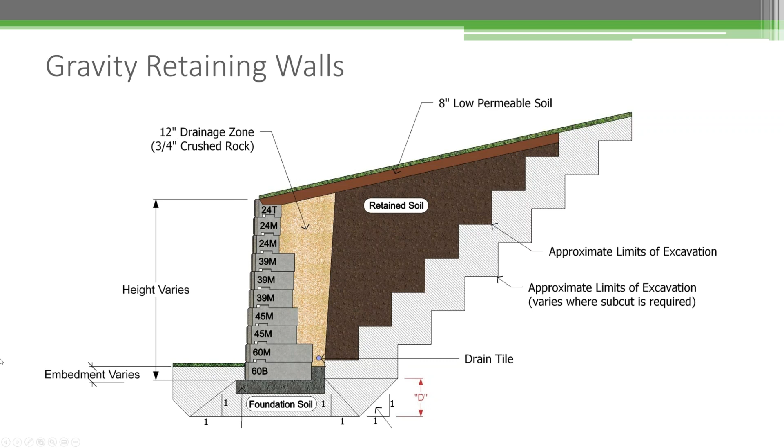Our face sizes are 48 inches long by 16 inches tall, and our depths vary from 24 inches deep from face to tail all the way up to 84, as we'll go through the slide here.

Our blocks are solid concrete. There is no rebar reinforcing. The only metal that we have in our blocks are the galvanized lifting loops that are used to install our products. They're made of wet cast concrete.

It's a durable 4,000 PSI minimum. I think the producers here in Minnesota, Interlock, in conjunction with Rochester Concrete Products, are making a DOT mix that I believe is at about a minimum of 4,000 PSI with 5 to 7% air entrainment. All these numbers mean is that it's a very durable product versus a standard dry cast unit. It's going to last a lot longer through a lot more of those freeze-thaw cycles.

So what is the advantage of a gravity wall? Well, the main advantage is the base to height ratio. Most retaining walls that require geogrid reinforcing have a base to height ratio of about 60 to 80%. Now what that means is a 10-foot tall wall that requires geogrid reinforcing is going to require at least 6 to 8 foot long geogrids, again depending on the soils, the surcharge, and the back slopes and toe slopes.

A gravity wall can get down to as low as 35%, which is on the very low end. Typical is between 40 and 50% of the wall height. So what this allows our product to do, and most gravity wall systems, is to be able to tuck that retaining wall further into the construction cut, closer to the property line, and really maximize that usable space at the toe of the wall.

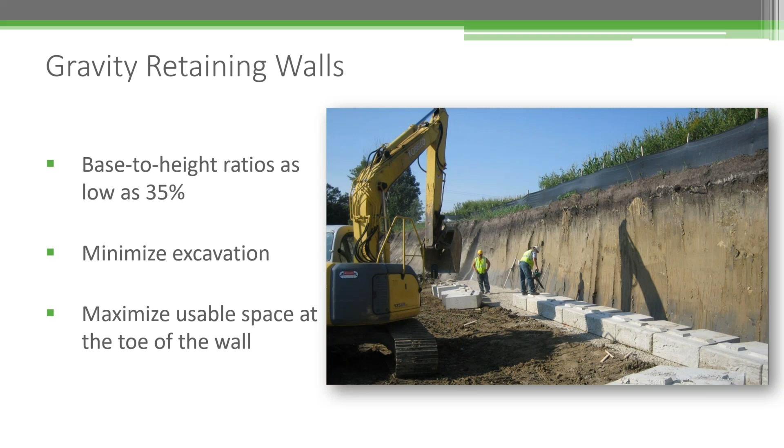This is a construction photo from the Maple Grove Hospital. They have a handful of retaining walls around there right now, and I believe they might be adding some more here in the future. You can see that this is a vertical construction cut. Most sites will not allow a construction cut like this, just from the soils perspective. But this allowed the installer to really push this retaining wall as close to the property line as it could, which is actually the silt fence up top, and again maximize that usable space out front.

Now, if you don't think you've ever installed a gravity retaining wall, you probably have. Most of the small block dry cast units, whether it's 4-inch, 6-inch, 8 inches tall, if you built these things up to about 4 feet or less and didn't use reinforcing measures, whether it's a tieback or geogrid reinforcing, you've essentially built a gravity wall.

You are relying solely on the mass of that retaining wall product to hold back the soil. Now, as you stack up those blocks up to 5 feet, 6 feet, 10 feet, what you're trying to ask that retaining wall product to do is hold back a lot more soil pressure. So in order to do so, that retaining wall product needs to be a lot heavier. Now, a small block system weighs about 80 to 90 pounds. They are just not heavy enough to resist those overturning forces on a wall that's taller than 4 or 5 feet tall. So we need to use deeper blocks, which is where ReCon comes in.

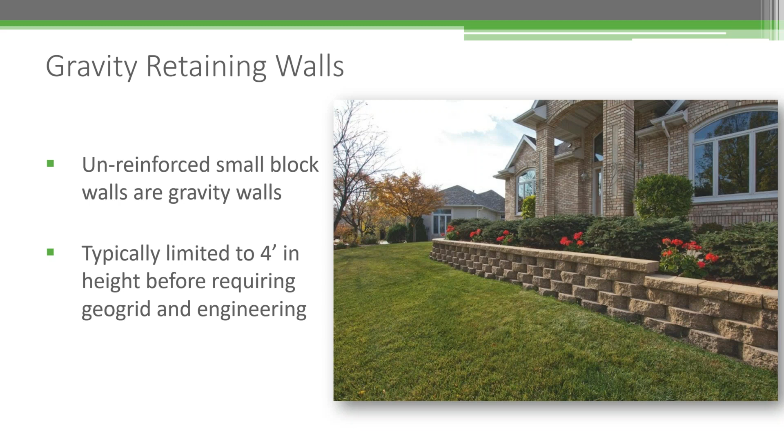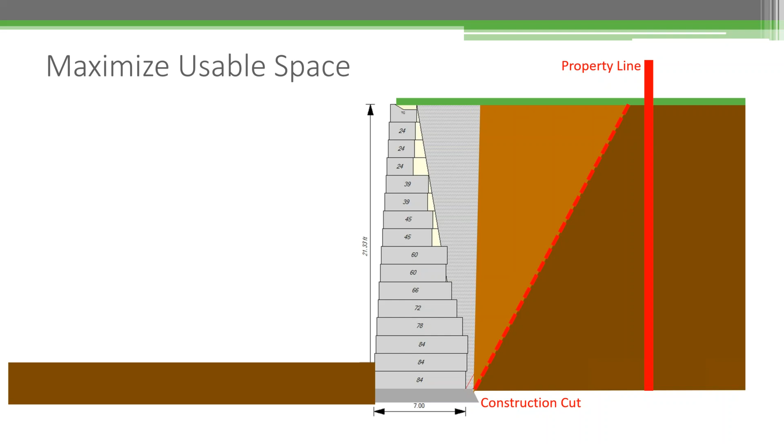Now, with base to height ratios as low as 35%, we can use our big, heavy, massive wet cast blocks as the resisting mass for these retaining walls up to 20, 21 feet tall. Now you can see how much further back we pushed that wall. We essentially went from a 15-foot base to height ratio down to 7 feet, so we gained about 7 to 8 feet out in front of this wall.

For most homeowners, that space is not going to be as dramatic, but for people with really tight property lines, where they basically want to come in and perform surgery on these job sites and maximize the usable real estate out front, the gravity system is definitely the way to go.

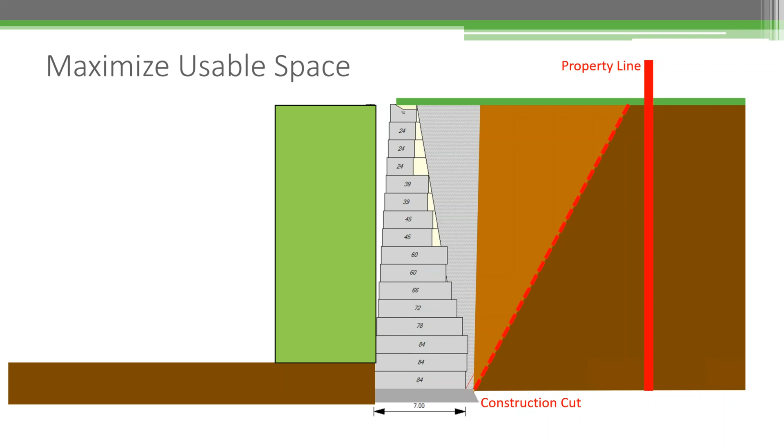So how tall can we go? With sandy soils, with no surcharge loading up top, no toe slope out front, no back slope, and a standard NCMA design, with our traditional 84-inch deep units, which is our deepest unit made out of our standard forms, we can go up to about 21, 22 feet tall, unreinforced. That's a very tall gravity wall.

For the most part, a lot of the projects are kind of in that 6 to maybe 15-foot wall height. That's kind of our sweet spot. We can add a ton of value versus other traditional retaining wall products.

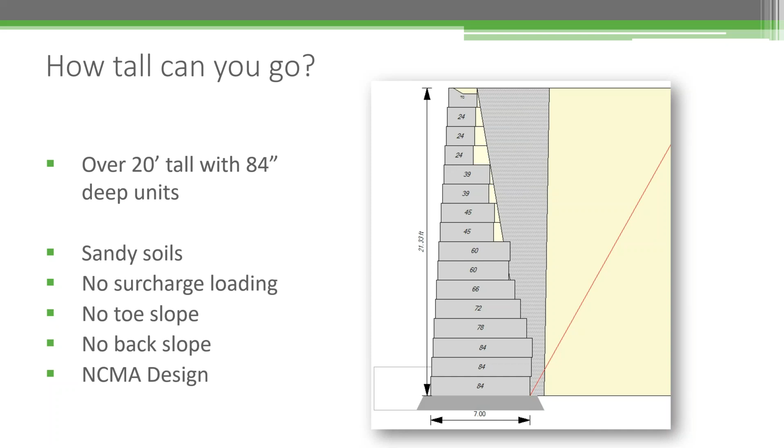How tall have we gone in the past? This is a 32-foot tall, unreinforced gravity wall that was built in New Hampshire less than a year ago. Lots of engineering, lots of very deep blocks, especially the 132-inch deep base block at the base. I would say this is the upper limit currently of our retaining wall system. So anything under 32 feet, we can definitely add a lot of value to your project.

You can see here that they have our 6.5-inch capstone on top of this wall, and they have mounted a pedestrian railing, not just to the capstone, but to the block below it, to add the resisting mass for the overturning forces of the pedestrian railing.

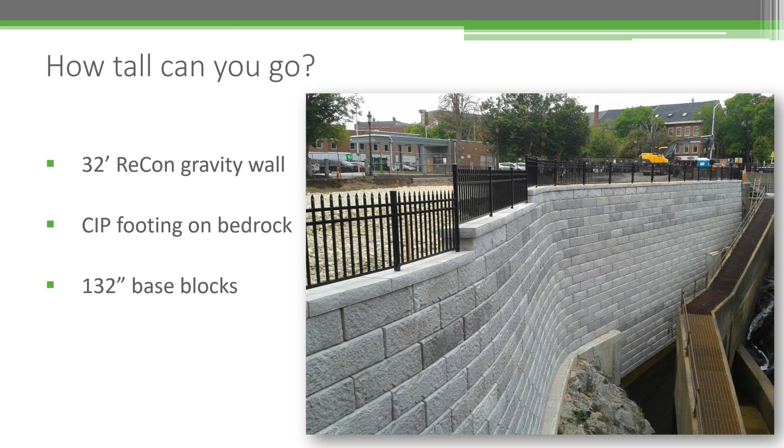Now, traditionally, since a gravity wall system is designed to maximize the usable real estate out front, we want to tuck those walls as close to the construction cut, as close to the property line as we can. So most of these gravity walls are going to be built from the face. You're not going to have access or enough room for equipment behind the face of the wall. And if you're building a wall taller than, say, 12 feet or so, some of your equipment might not be tall enough to reach the top courses.

I don't want to discourage anyone by showing all these giant walls. I know we like to brag about them here at ReCon, but our product looks just as comfortable on a job site as it does in a backyard. Now here's our rustic texture. This is actually from a project in Norway. They have left this product unstained. And we'll talk about staining here in a little bit.

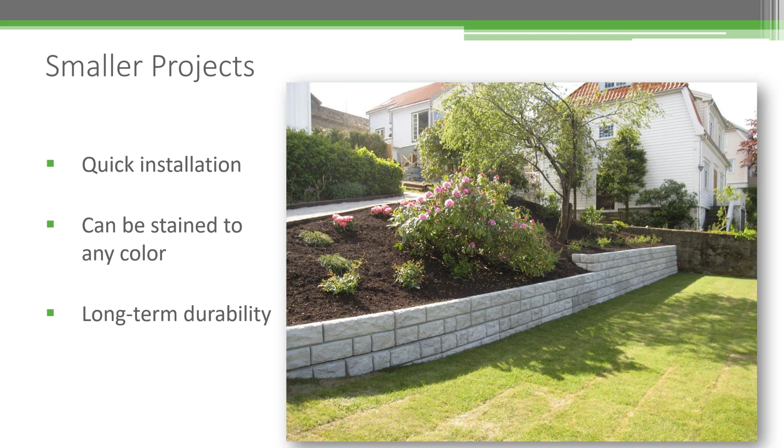Here's another small wall. It's about a 4-course tall wall, 5.33 feet in height. I believe they have used our steps or capstones through the step area to gain access from the driveway up to the yard.

Again, they left this granite texture unstained. You can stain it to whatever color you want using a water-based or a latex-based or even an acid etch stain.

With all the road salts coming in off the road on the driveway, this product is not going to break down, as we have seen with some older, smaller dry cast units in the past.

In walls like this, they can be designed relatively cheap and installed relatively quickly. A 1, 2, or 3 man crew can easily install this wall in a day. They're not lifting up these blocks by hand - they weigh about 1,400 pounds on the low end, up to about 4,100 pounds on the high end.

So moving along, reinforced retaining walls. We've already talked about these a little bit. A large portion of our walls are installed using reinforcing geogrid. The facing component is then our 24-inch deep unit, which is our smallest unit. The base to height ratios for these walls are between 60 and 80% of the wall height.

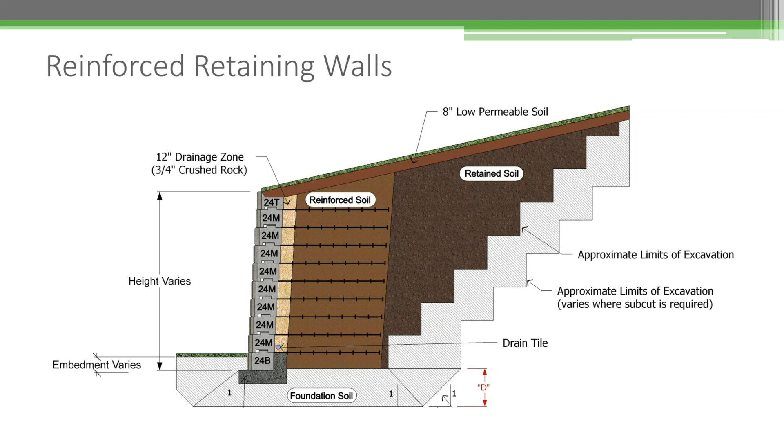How tall can we go with these? Our tallest to date is a 36-foot tall wall in Stillwater, Minnesota, sitting behind an apartment complex out there. This is our limestone texture, stained to match the local colors, the local natural stone of the area. They do have a capstone up on top. This is actually a tiered wall system.

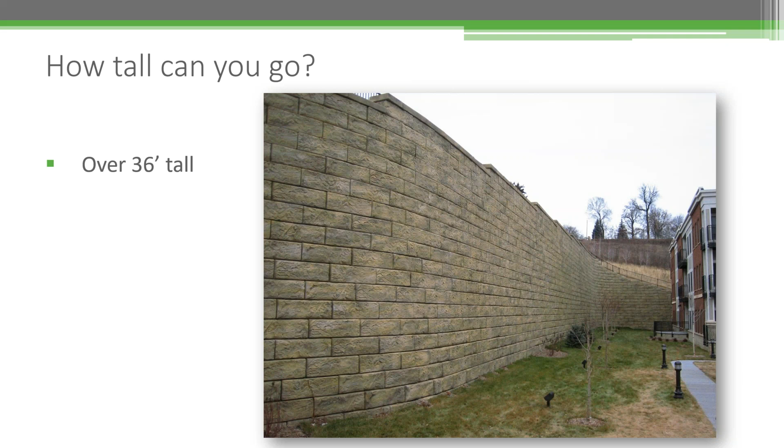This picking device can easily pick up a 24 or 39-inch deep block from the inventory pile and place it on the wall face relatively easily.

You're not going to have an extra guy on the ground unchaining and rechaining blocks all the time from an excavator. You can have one guy in a skid steer, one guy on the wall face. Those two guys can stack a ton of blocks in a day.

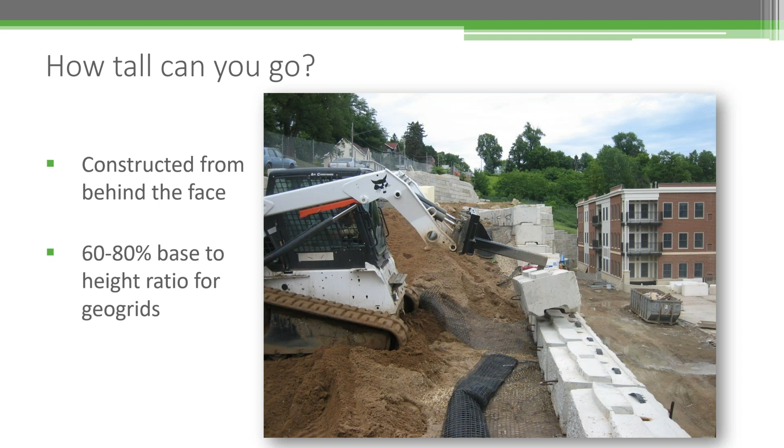Obviously, reinforced walls are nothing new. This is a picture from the Rockwoods website - a very tall, reinforced small block wall. They've got a tiered system out here. A reinforced wall is simply a concrete facing, it doesn't really matter what it is out front, with reinforcing geogrid sandwiched in between the blocks.

They're very stable. They're relatively inexpensive to build from a product perspective. They do take a little bit more time, a little bit more labor to both compact that reinforced fill and place it. We do a lot of these walls as well - I just wanted to show you what was out there.

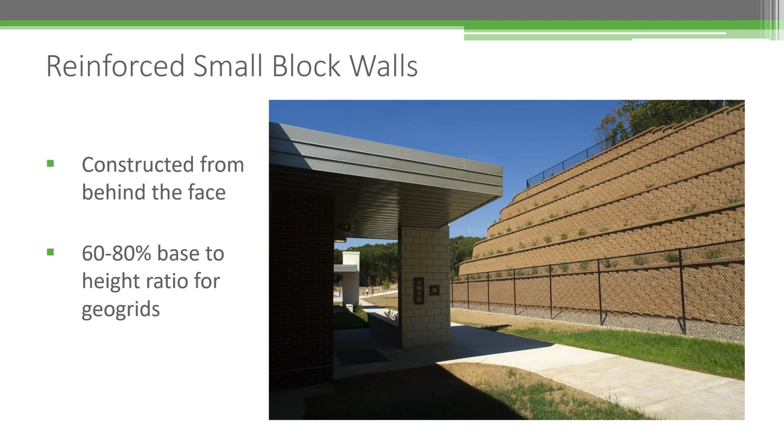So what about our textures, top of wall options, and fence blocks?

Minnesota is a unique ReCon market in that we are headquartered here. RCP and Interlock actually offers all 5, now 6, of our textures to the market here. Le Sueur County Limestone is the one that they carry the most of - this is the product that is most widely in stock for them.

Now, you're going to see a lot of stained walls out here. Our product is going to be delivered to your job site as cast gray. It will be up to you, the installer, the architect, or the owner of a project, to furnish the staining yourselves. A lot of the installers like to stain our walls. We do have a staining guide available that has product recommendations for everyone.

Staining is one thing that's kind of unique - it's in the eye of the beholder, where from one customer to the next, they might not like the exact same stain. So I think if you're going to start staining your own walls, it would be in your best interest to get a sample, stain up a block that's going to be below grade maybe, and see if your customer would prefer that color over another one.

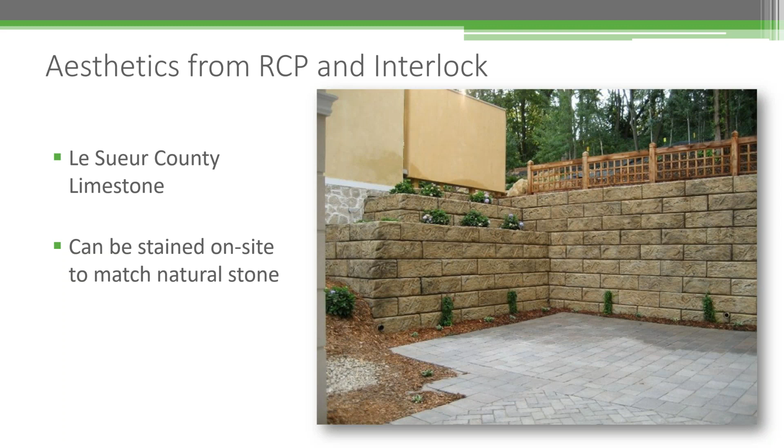North Shore Granite, I would say across our system worldwide, this is our most popular texture. Most of the time this is installed as cast gray and is not stained traditionally.

Our rustic is our 8-inch stack stone coursing. These are still full face blocks, 48 by 16. And the depths again range from 24 from base to tail all the way up to 84. But this one just looks like it's an 8-inch stacked stone look.

I would say this texture, more than any other one that we have, eliminates picture framing, where you really can't tell where one block starts and the other one begins. It kind of just looks like one big monolithic stacked stone wall.

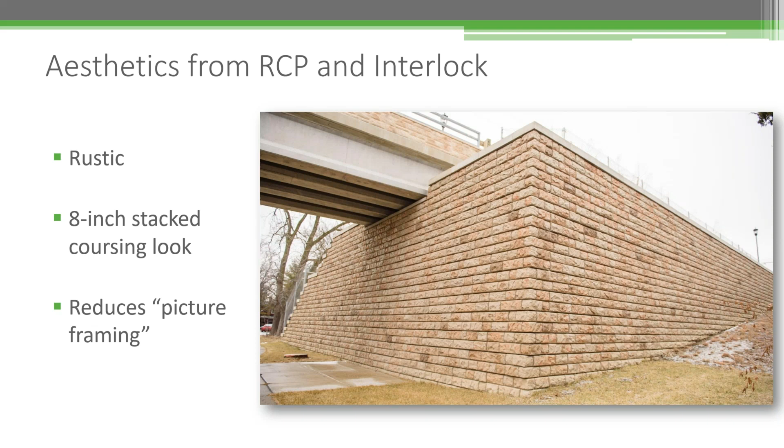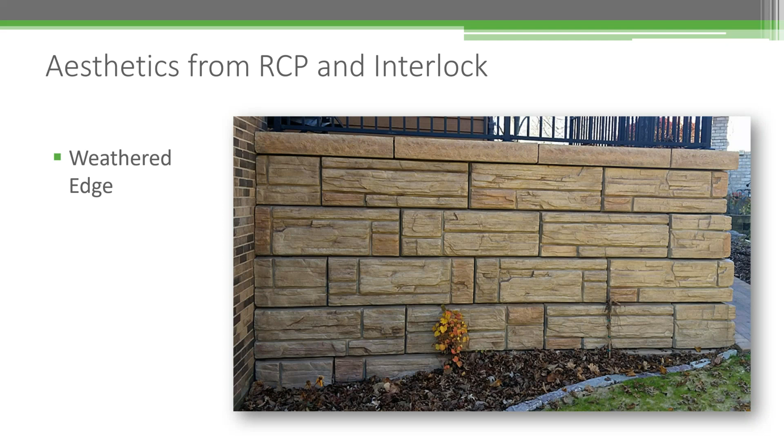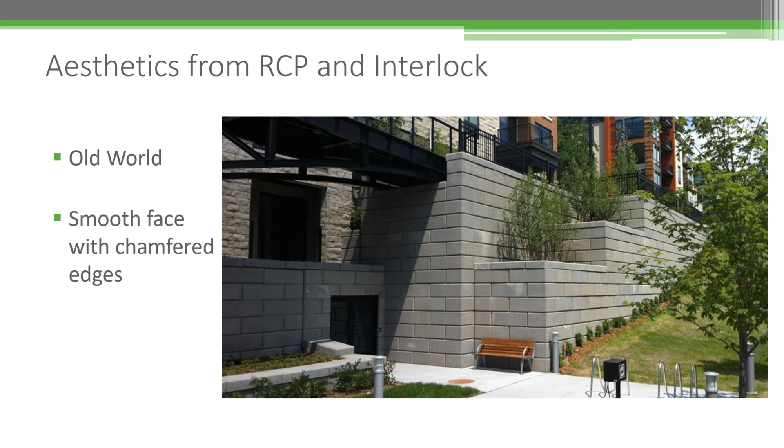This one's actually stained, maybe a 1 or 2 part stain. Again, it can be stained whatever color you'd like. I would say, contact your local RCP rep for pricing and availability for all of these textures, for all of these block depths.

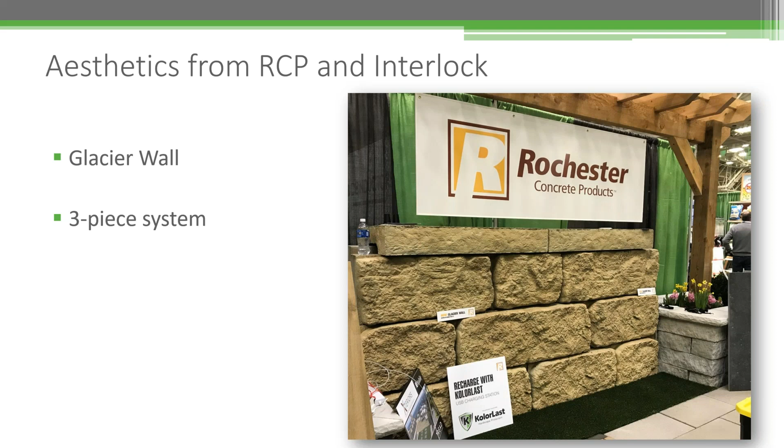Obviously this is a very large wall. They've got some JLG equipment to reach the top of the wall. But for the most part, 1 to 2 part stains is going to be what you're going to see on a lot of our walls.

Like I said, we do have a ReCon staining guide that is available. We do have some products that we have seen used in the past, from Sherwin-Williams to TK. At the end of the day, any concrete stain, if you can stain it on a horizontal surface, you can probably stain it on a vertical surface, maybe just a different application method, whether it's an airless sprayer or a rag or something.

I think the most important part about staining is if you're going to do it yourself, you need to make sure your first step is to, at a minimum, power wash the wall. These products are made in steel forms that have form release agents on them. They still will remain on the face of the blocks for some time, depending on how quickly they were made or from how long ago they were made. So whether it's just a simple power wash or maybe even a muriatic acid solution to really score up the face and get all those oils off, it'll really accept your stain a lot better.

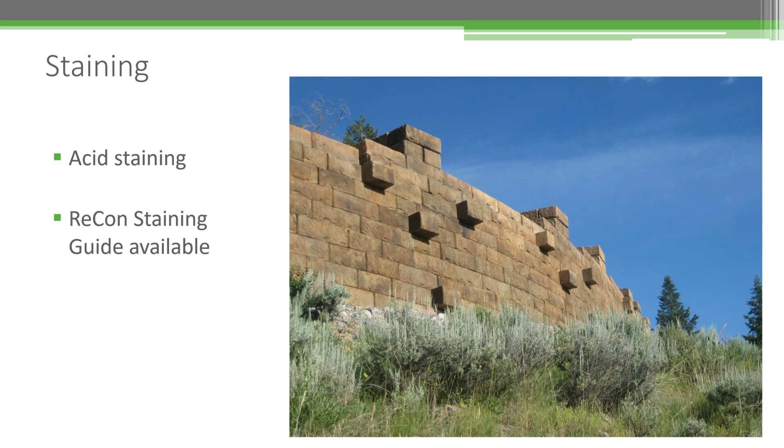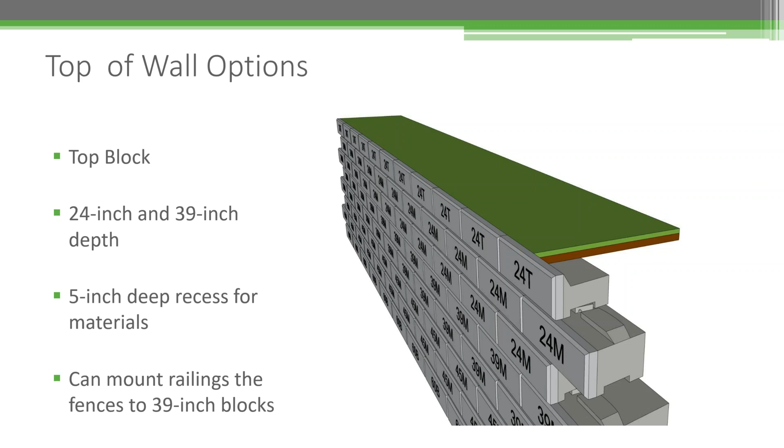Now, if you're planning on mounting a railing to our top blocks, our 24-inch deep units are just not quite heavy enough to withstand the overturning forces as required by the IBC code. We do, however, have a 39-inch deep top block from face to tail that is heavy enough. So when you mount it, whether you plate mount it or have holes cast through the block to slide your fence post in there, a 39-inch deep top block will be heavy enough to withstand the overturning forces as recommended by the IBC code.

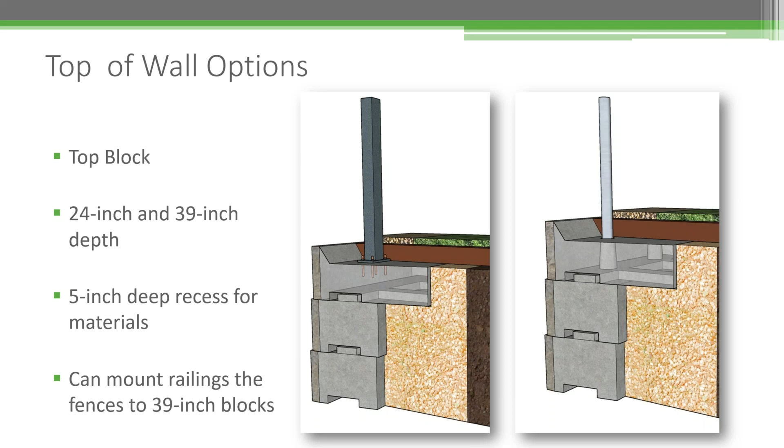Here's that 39-inch deep top block in action. This is at an airport in Texas. Obviously this is a commercial job site. They wanted this hand railing, this pedestrian railing, to be nice and strong and sturdy, and all they needed to do was plate mount it to our 39-inch deep top blocks.

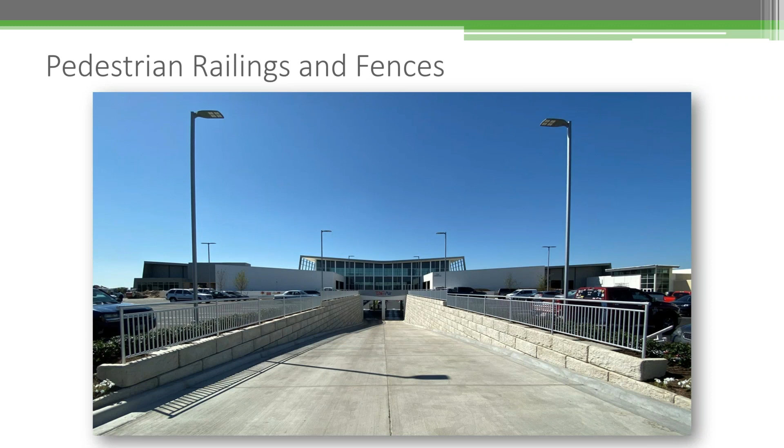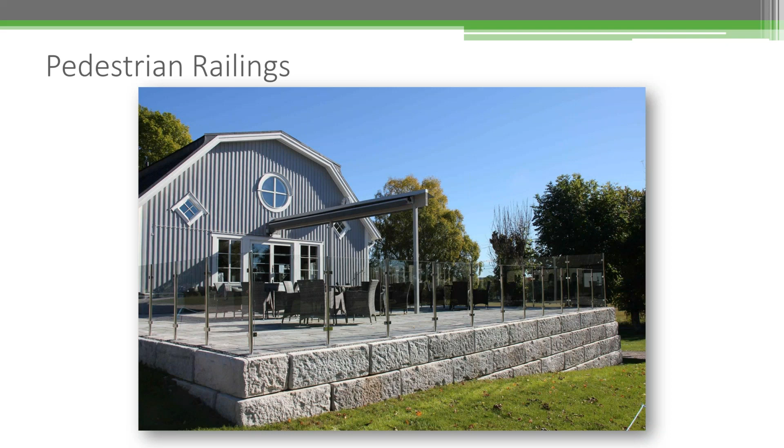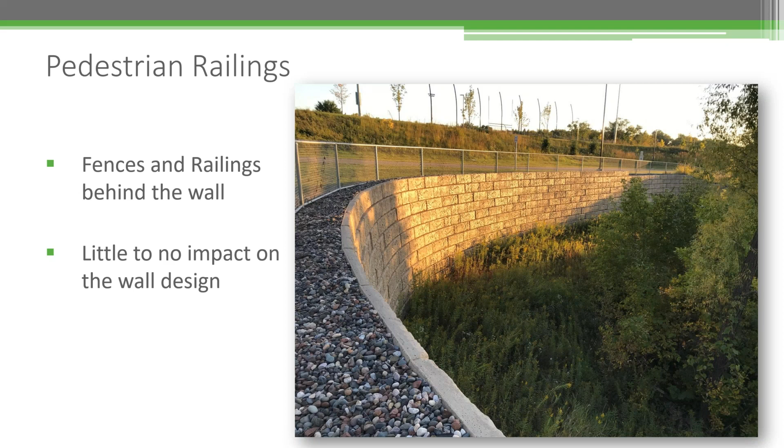Capstones. Here in Minnesota, you guys again have a unique opportunity - you have 2 different capstone heights, a 6.5 inch tall and an 8 inch tall capstone. The standard one is 6.5 inches tall. We've done a lot of amphitheaters in this state, a lot of small walls. It's kind of a traditional accent capstone like you'd see on a dry cast small block unit. It's 26 inches wide, so it's 2 inches wider than our 24 inch deep unit. You can push this thing all the way forward to have a 2 inch overhang on the front, or push it flush with the face. It's really up to the customer.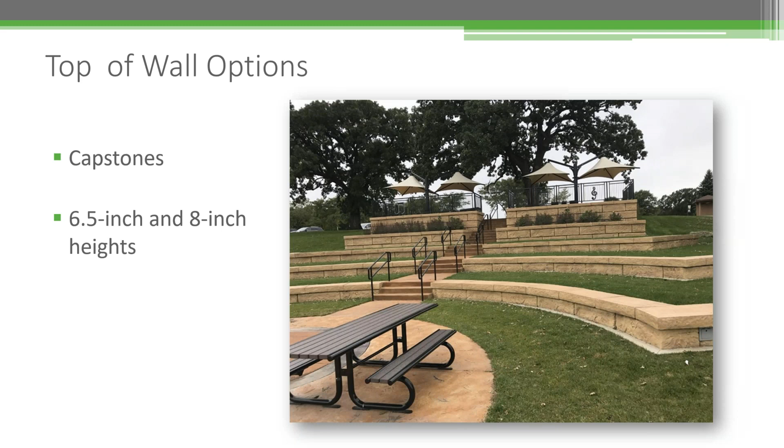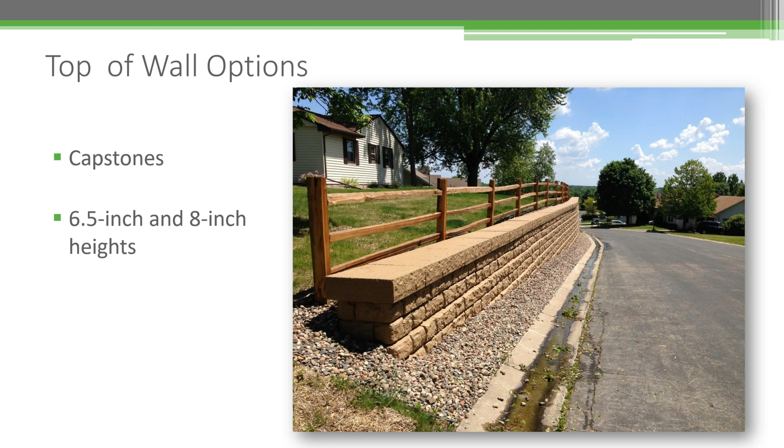Here's Trinity School, again here in Minnesota - they have an 8 inch capstone. The architect wanted to match the 8 inch coursing of our rustic, so the 8 inch capstone was used here. This was just stained with one base coat, 2 base coats, of just one color of stain.

Our 6.5 capstone is actually underneath the ADA requirements for step heights. So 6.5 inches is under what they require, so we can use our capstones as steps through our walls, something we've seen quite a lot of. There's a ton of pictures on our website if you'd like to check that out.

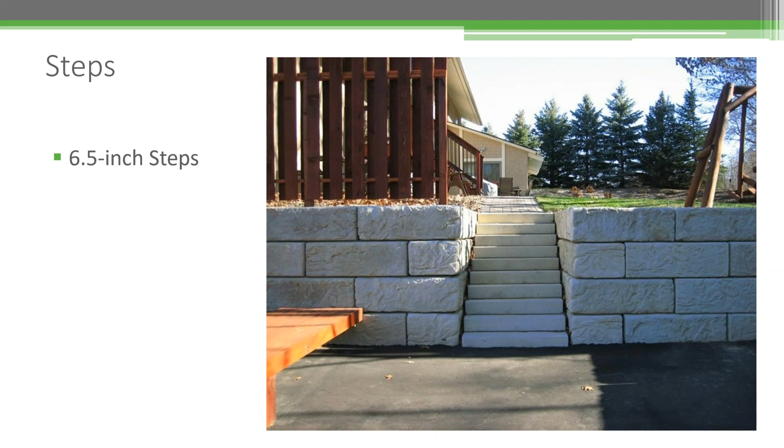The final option is the full high cap. This is a full height, 16 inch tall capstone, which has textures both on the face of the wall and on the back side and on the top. So when you have sloping grades like you see here, whether it's a driveway, sidewalk, or even just a sloping yard, instead of having to step down 16 inches at a time, you can keep this grade nice and steady all the way down and still pick up texture on the back side of your wall.

You can see here that they have actually mounted a fence to this. I believe they just kind of cored into these blocks and slid these posts right down into there.

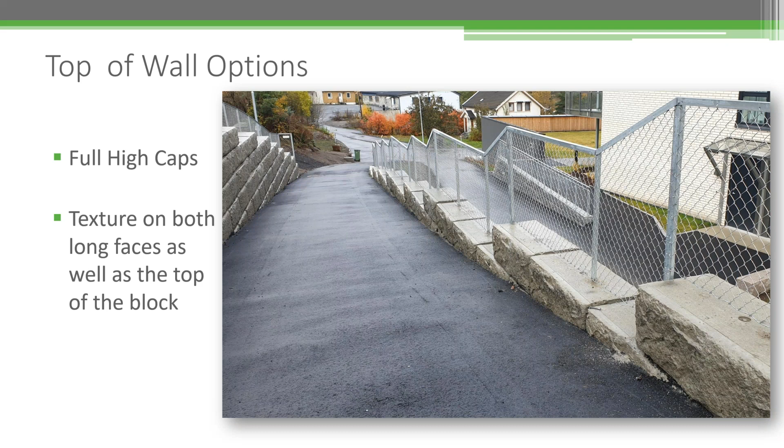In line with our fence, with our full high cap, we do have double-sided fence units that do not have texture on top. This picture kind of has it all, really.

In the background, we have a near vertical gravity wall. Our walls have a built-in batter of 3.6 degrees, or 1 inch per course traditionally. In order to meet the abutment and the vertical brick face, the contractor in the field cut the back off of the tongue to slide that block an extra inch forward, and it allowed them to build a vertical wall. This wall was designed with vertical batter, so it was not a last-minute thing.

In the foreground here, you can see a full high cap. This is actually on top of many different fence blocks, so on the back side, the railing side of this wall, there's also texture on there as well.

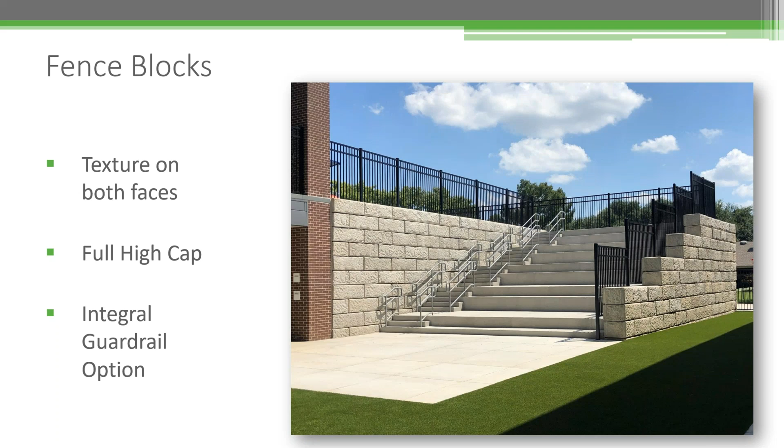One thing that's kind of cool about our double-sided fence blocks is that we can cast holes into them, and attach them with rebar and grout to either a 60-inch deep unit or a 72-inch deep unit. This 3 or 4 block system can be used as an integral vehicle barrier. It can meet the IBC code of 6,000 pound impact or an AASHTO TL1 of 13,500 pounds.

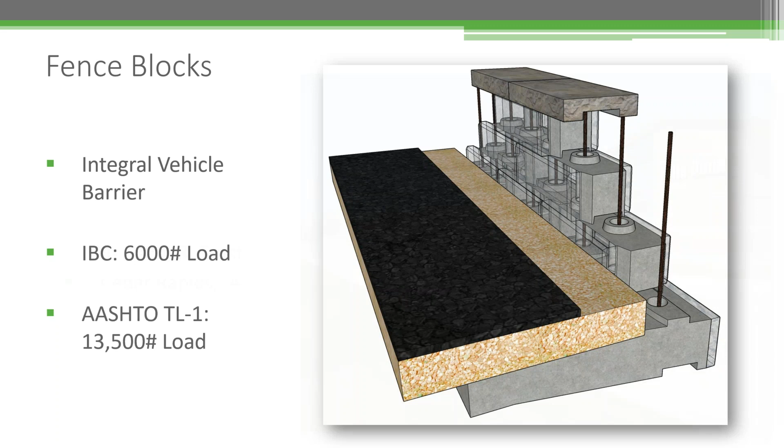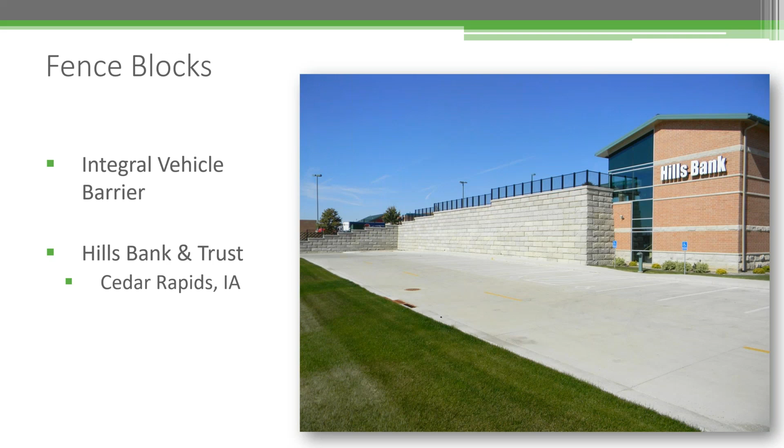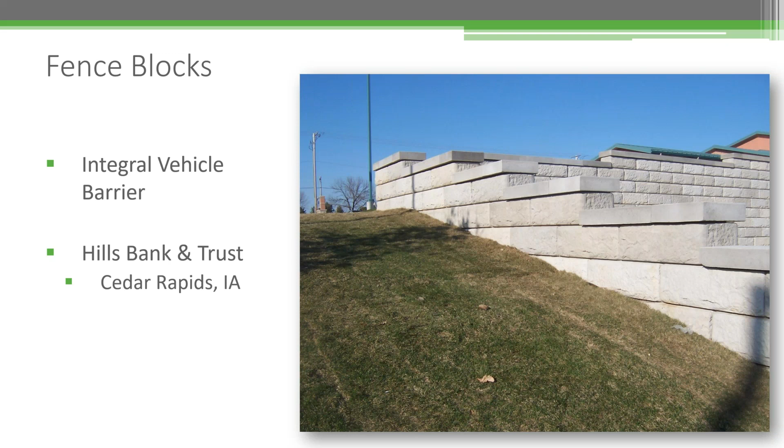So here's a project down in Iowa. It kind of has it all, really. We have a standard retaining wall out front. They've got fence blocks with capstones as you walk around up to the top of the parking lot. Then, as you're in the parking lot, you're looking at the back side of a fence block with a capstone on top. But what you don't know is that 2 or 3 courses of these are attached together with a moment slab block below grade.

And if you were to run your car into this, it will act as a vehicle barrier, and you will not go over the face of the wall down to the lower parking lot.

What this integral guardrail does is maximize the usable space behind the wall, as opposed to the space out in front that we have for a gravity wall. A guardrail system out front, whether it's a post and beam or another type, is going to take up space between the wall back and the curb, and they just didn't have that room here, so they wanted to make the wall system the guardrail system, and we definitely have those options as well.

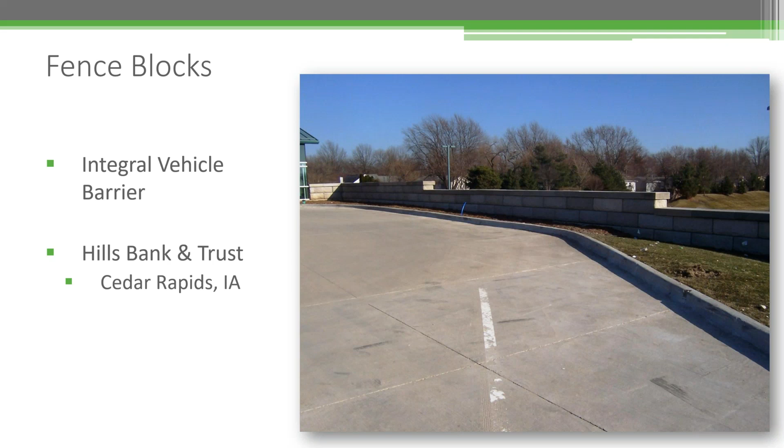These are very complicated projects, lots of pre-construction planning, lots of pre-bid planning, a lot of in-the-field cutting of blocks. And if you've ever had to cut a 90-pound dry cast unit, it doesn't take too long. If you're thinking about cutting one of our units, it can take a significant amount of time unless you have fitting blocks.

I think most of our big block competitors do not have contractor-friendly fitting blocks that allow you to easily modify the blocks. If you've ever had to cut from face to tail, either a 24-inch deep unit or a 39-inch deep unit, you know that it'll take a ton of time. So if you know that you're going to have cuts in the field, or you anticipate having to do cuts in the field, ask your RCP rep for some fitting blocks. We do have 24 and 39-inch deep fitting blocks, and our full high caps come with a fitting insert as well, so you can cut those blocks around radiuses on the tops of your walls.

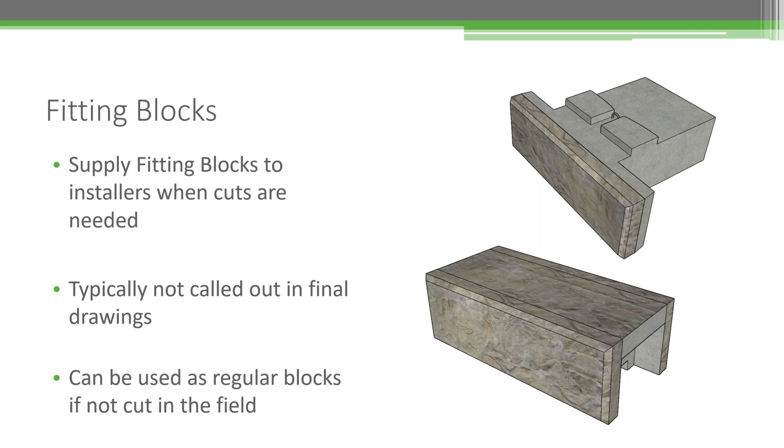Wait for my computer to catch up here. Sorry, guys. I'm looking at the audience view, and there's quite a bit of a lag here going on.

Okay, all right, installation equipment and tools. I did want to quickly talk about installing our product. It's really no different than any other retaining wall product, obviously much larger. But I did want to talk quickly about preparing for your project. Final stamp plans on walls that are greater than 4 or 5 feet are required here in the state of Minnesota. Obviously, taller walls that are unreinforced with gravity units are holding back a lot of soil, so we really want to make sure these walls are engineered. RCP has a lot of really good relationships with really good retaining wall design engineers here in Minnesota, so they'll be able to provide you nice, good quality stamp shop drawings that you as an installer can build off of. You can have confidence that the retaining wall you are installing is designed for the situation it's being asked to be in.

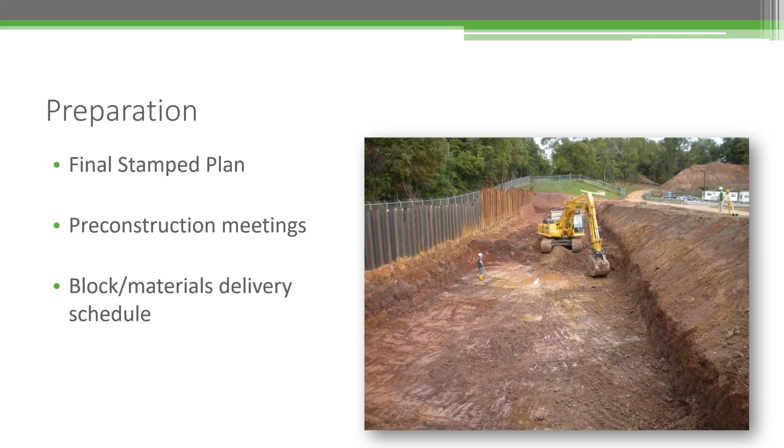Pre-construction meetings are also really important. Constant communication with your RCP rep is going to be really important, especially as you start to receive materials on your job site. We can only get about 32 to 34 blocks on the truck at any given time. They weigh a lot, so we can't get a lot of square feet on each truck. It's not like getting 500 or 600 square feet of small block delivered. You're only going to get about 160 square feet delivered per truck, and they take up a lot of room. So kind of game planning with your sales rep on what blocks you want to install that day or for the next couple of days, and coordinating with the interlock dispatcher so you can get the blocks you want on site when you want them is going to be pretty important.

What about crew size and equipment? Labor was a little hard to find earlier, before the events of the last few weeks. At that time, we were seeing a lot of crews downsize from 5, 6 guys down to 2 to 3. ReCon, since it's a machine-set product, can take a lot less guys to install it. Let's just put it that way. One laborer, one machine operator can pretty much install a ReCon wall all day long.

From an equipment perspective, at least an excavator, whether it's a mini X or a larger one, to pick up our bigger blocks. This is going to help you not only dig your base trench, but also set your first course as well. A skid steer to bring blocks from the inventory pile down to the wall site, same with any backfill material or aggregates, is going to be important. And then any compaction equipment. Compaction behind our walls, like any retaining wall, is going to be tremendously important. It's especially important on the geogrid wall, where you're really relying on that geogrid soil connection to add stability to your wall system.

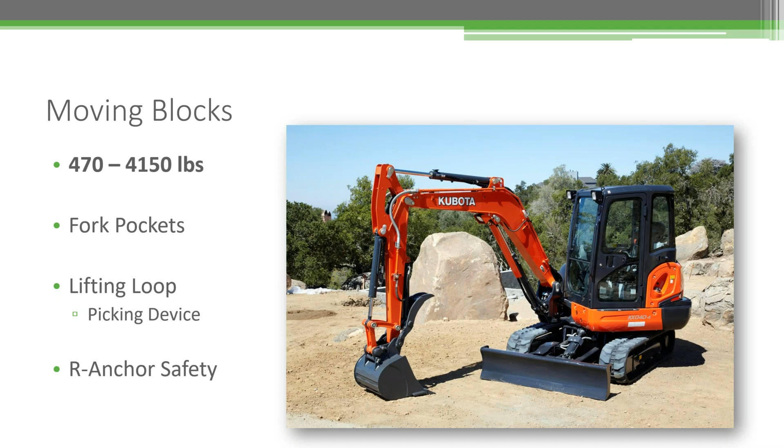For the most part, a mini excavator like this can easily pick up a 1,400 pound, 24-inch deep block. They might be able to pick up a 2,000 pound, 39-inch deep block with the arm up against the cab. But as soon as you go to extend that arm out to lay your base block in there, your hydraulics might be a little bit overtaxed, and now you're coming into a safety issue. So having a piece of equipment on site that is strong enough to pick up your largest block with ease is going to be a really important step during your bidding. Maybe you have to rent it or borrow it from another landscaper or something. Whatever you need to do, do not have undersized equipment on your job sites.

RCP makes blocks with fork pockets in the back. These will fit a standard 4-inch wide skid steer fork. You can easily pick these things up from behind, move them from off the truck to your inventory pile, from your inventory pile down to the wall site. It just makes it a lot easier to move blocks around the job site.

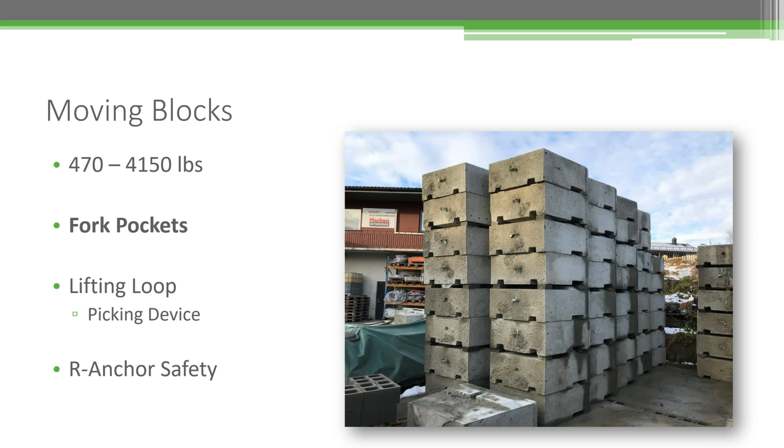We've talked a little bit about the picking device. It's a universal attachment for either a Bobcat, a Case, or Caterpillar. It has a very hard T1 steel hook on the front. We have tested this hook to about 65,000 pounds of force. It's a very high carbon product, so it's not going to wear. Our older ones tended to wear out a little bit, but this new one does not. I can definitely get you in contact with the guy who makes these. He's out of Rice, Minnesota, if you want.

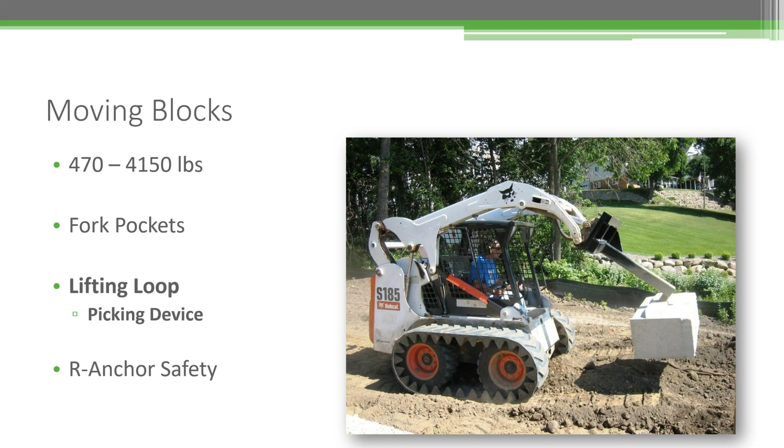A picture of this thing. Oh, we got some lag here again. Sorry about that. Yeah, so here's just another picture of that picking device.

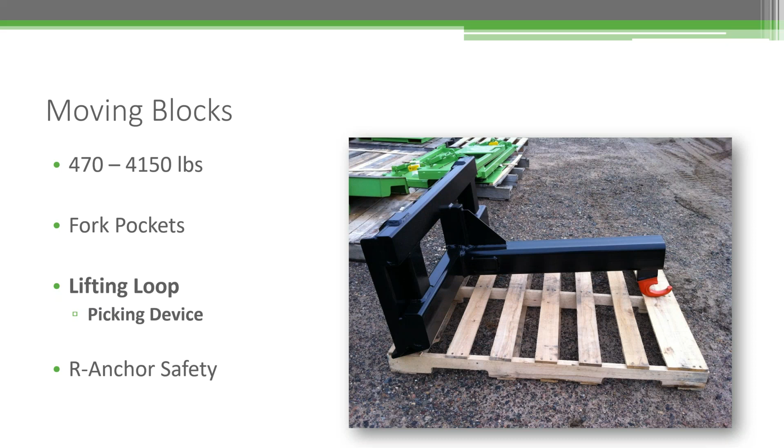I did want to quickly talk about our lifting loops. They are galvanized, solid rebar anchors. There is a right and a wrong way to pick these things up. Whether it's a pick hook, a clevis, or a strap, these are all good things to use. Never oversized hooks or even binding hooks, like for binding chains. Those should not be used.

If you're going to be transporting blocks across your job site suspended, we recommend that you use a cable, or even a chain with a cable extension on it, something to add a little bit of extra bounce to this. If you have a 39-inch deep block hanging from a chain, and you're walking it all the way across your job site with an excavator, you're adding a lot of dynamic loads to that rebar anchor. They're not really designed to do that. So you're putting yourselves and your crew at a little bit more risk if you're doing that without a stretching cable.

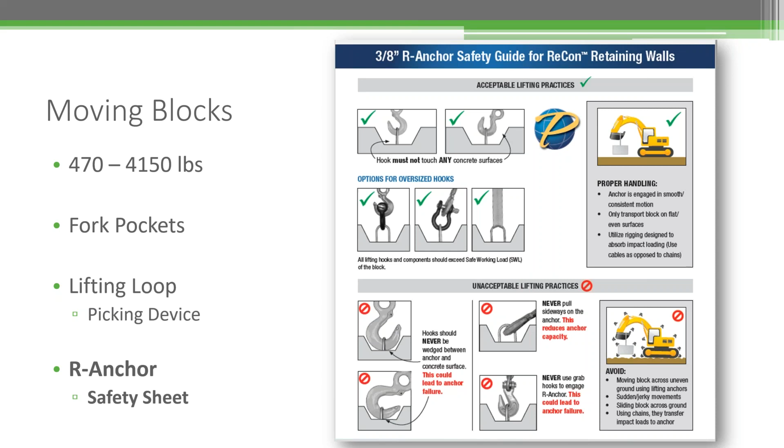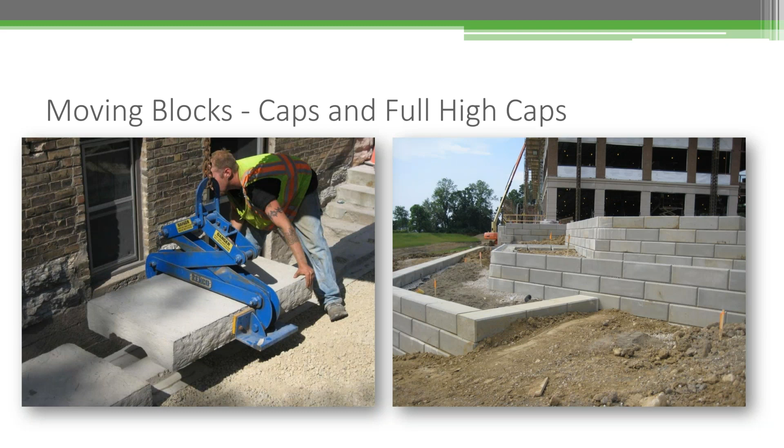Capstones and full high caps, since they do not have lifting loops on top, we do have a Kenco lifting clamp that we can sell. I think PaveTech makes one too that we've seen used for capstones. Our full high caps are about 1,500 pounds. I'm not too sure of any other lifting system other than Kenco, maybe there's some out there that can easily grab onto and lift that weight of block. Most of our big-time installers have their own. I think you can either rent or purchase these from RCP or from ReCon as well.

Hand tools and electronics, basically the same tools that you're going to use to install small blocks, you're going to use with our big block system. Laser transits, levels, string lines, marking paint, backpack blowers to clean off all the rocks off the top of the wall, and a 14-inch diamond bladed chop saw.

Honestly, the whole process is very similar to installing small blocks. You dig your base trench, set your leveling pad material, level your base blocks. The only real difference is that if you take a 5-pound dead blow hammer and try to smash one of these 1,400 pound blocks to get it to level in, it's not really going to go anywhere. So now your excavator bucket becomes your hammer. And if you've got a guy in the controls in the cab with some pretty heavy hands, they can take all of your base course leveling work and prep work and throw it out the window.

So constant communication from the guy down in the trench to the guy up in the machine is key. Push down on this corner, push down on this corner. Gently tap the back, gently tap the front. You're going to be spending a lot more time preparing your leveling pad than you'd have traditionally with smaller blocks, just because you really don't have a lot of room for error when it comes to setting that block down on the ground.

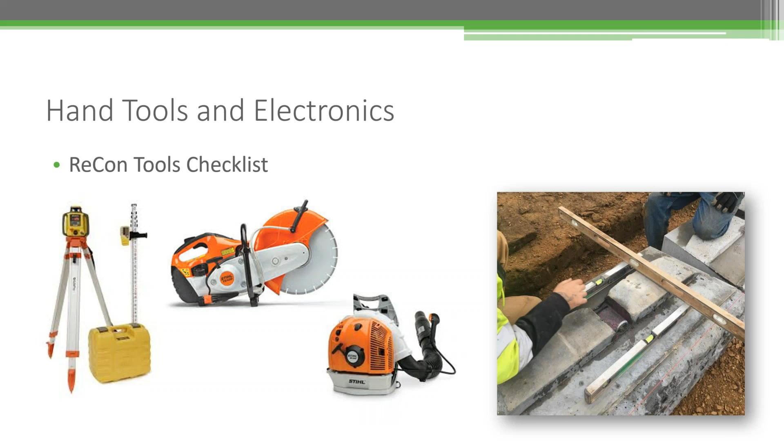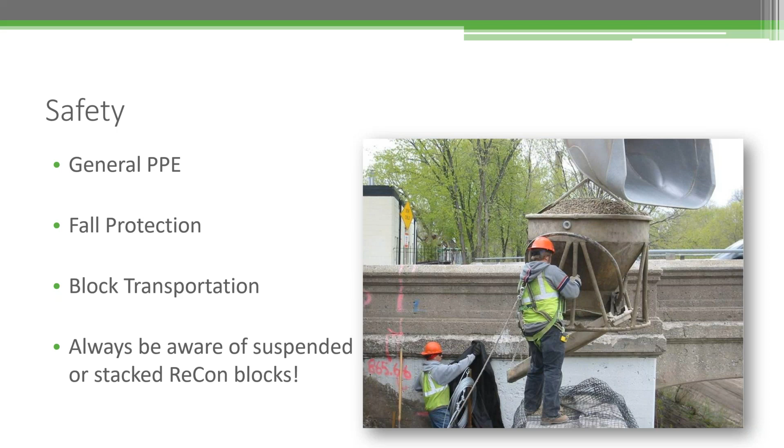As always, safety is our number one priority. Just general protective equipment, fall protection if you need it, if you're on a larger job site.

One thing I do want to really mention is, when you're moving blocks across the job site, whether it's on a skid steer stacked up two or three tall, or suspended from a cable or a chain, always be aware of stacked and suspended blocks. These things weigh 1,400 pounds, so if one tips over on you or falls on you, it can be a pretty bad afternoon. I've had numerous close calls in my career, and luckily I walked away from all of them. So anything you can do to not be under your blocks or in front of a moving stack is going to be tremendously important.

I do have just a couple case studies for you guys to really highlight the value that ReCon can add to your project and your customers.

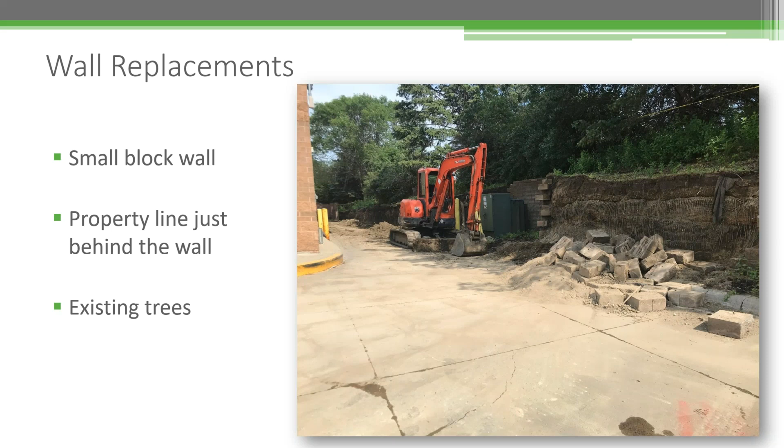This is a small block wall failure, not a very tall wall, here in Minnesota. I don't think the wall product failed—that's rarely the case with a retaining wall failure. For the most part, it's poor compaction behind the wall, improper water management. Sometimes these things are just not installed the way that they need to be. In this case, this is a small block wall with geogrids. You can see they have some electrical boxes right in front of the wall, and I believe the property line is very, very near that tree line.

Now, the installer was able to tear out the small blocks and leave a vertical construction cut because there's still geogrids holding back the soil. There's obviously a lot of roots in there helping out as well. But this was basically a surgical site—the contractor was allowed to come in, perform surgery, and excavate as little as they could in order to fit those 24-inch deep base blocks down in that trench.

If you were going to rebuild this with traditional small blocks and grid, or even big blocks and grid, you'd have to excavate an extra 2, 3, 4, 5 feet into this hill, compromising the trees, possibly getting into the property line or other utility lines. The gravity system really allowed them to perform surgery, like I said before.

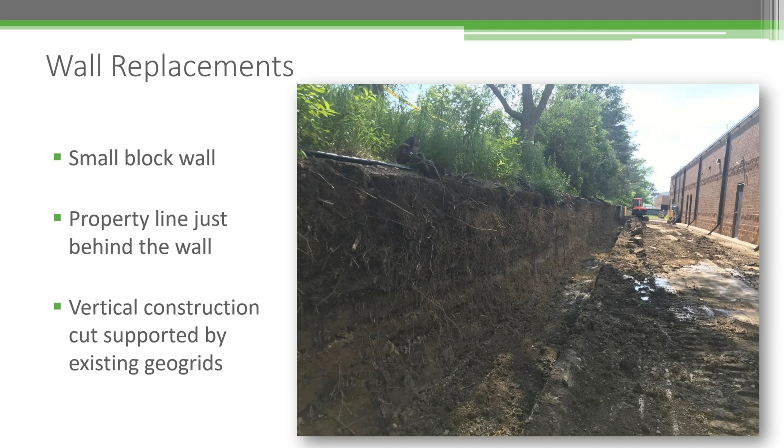Here's the finished product. They decided to put the fence behind the wall, so they didn't require 39-inch deep top blocks. They used our full face limestone texture.

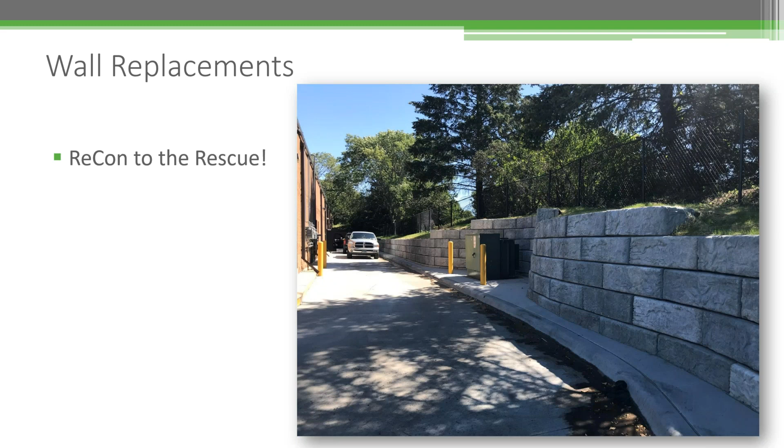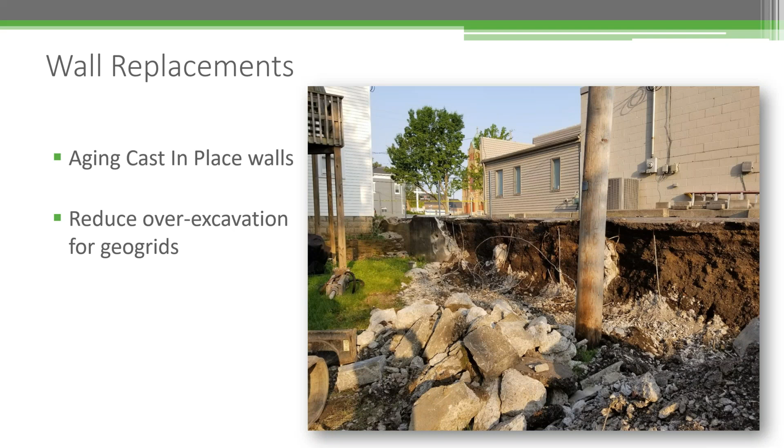They were able to excavate as little as they needed to, stack up the blocks, put a foot of rock behind there, compact it, repave it, and bring asphalt pretty much all the way up to the face of the wall here. These are top blocks up front or on top.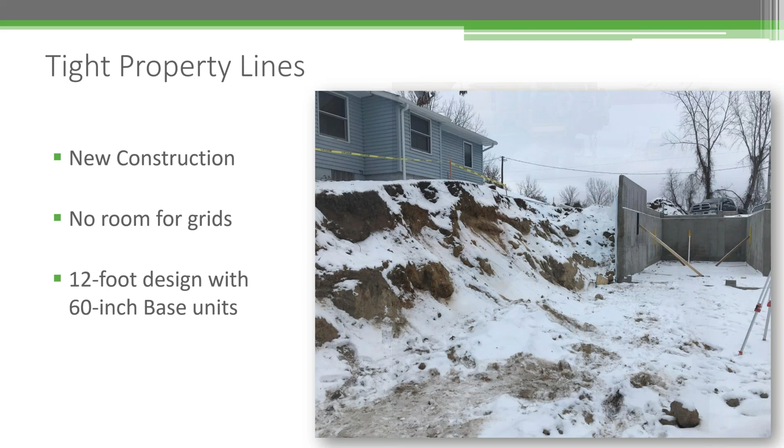This is about a 12-foot tall wall right at the foundation there. So you need a 60-inch deep base block, based on the soils and the loading up top. The installer was able to excavate a little bit further into the hill and install the 60s. You can see they've got a large excavator.

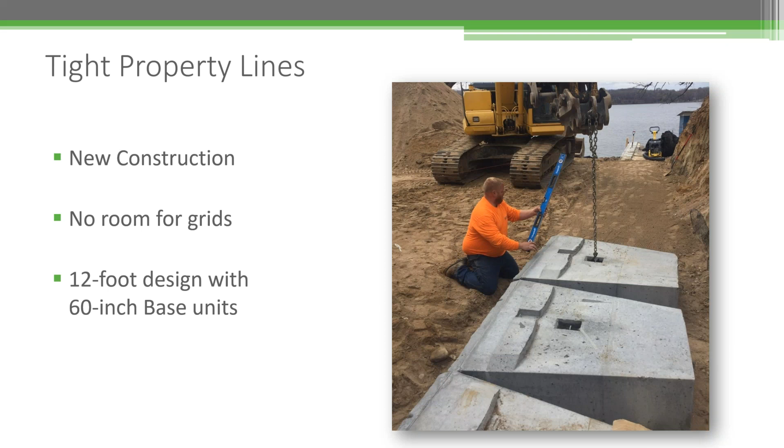They did use our weathered edge texture, 12 feet up at the top where the house is there, stepping all the way down to the lake.

I've not been here, I haven't seen photos of this project in its completed state, but from here it looks pretty dang good to me. You can see how close to the neighbor's yard they had to make their construction cut.

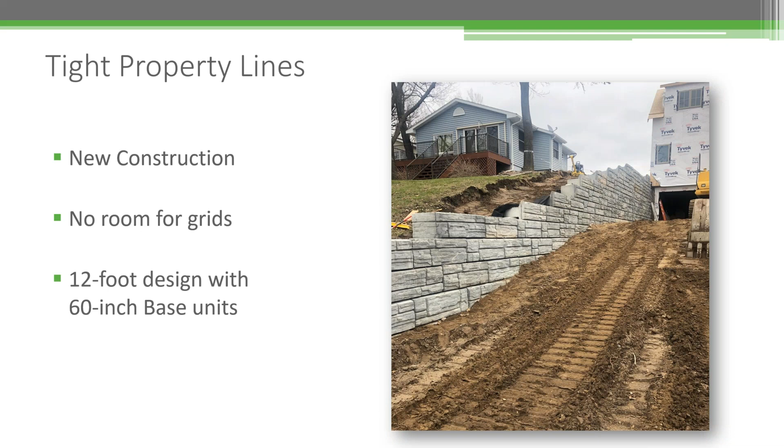Water applications - being a wet cast, air entrained, durable product, we do a lot of water applications. We can handle a lot of freeze thaw cycles. This is a project here in Plymouth, Minnesota. Failing walls - not the block's fault, but probably poor water management, a lot of settlement, just not a lot of long-term forethought for this wall.

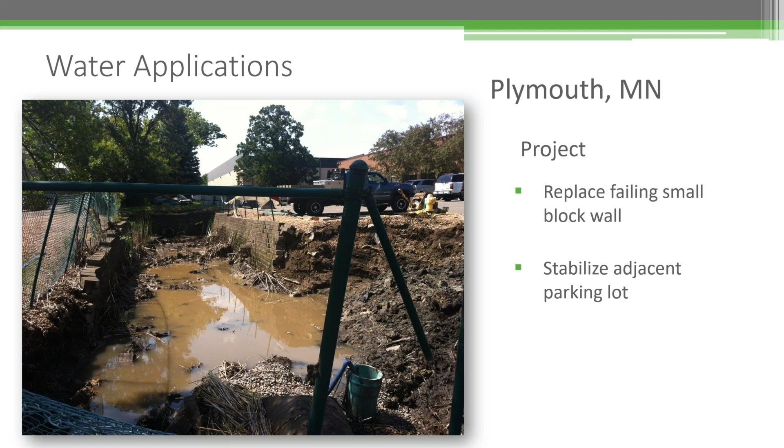Our installer came in there, ripped out all the stuff, laid a competent base course, competent leveling pad, backfilled with free draining stone, knowing that water was going to get both behind these walls and in front of them. We do not want that water hanging back in that retained soil, so that's why we use free draining stone wherever there's water.

Top blocks with fences behind there. I think it's a much cleaner look. It's a much safer wall, much safer fence around there. Really adds a lot of value to this property.

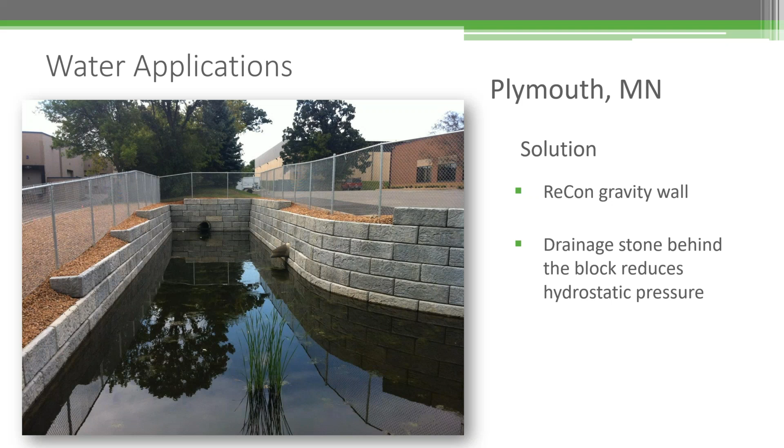Touched a little bit earlier on seating walls and amphitheaters. This is just a quick one here, actually over in Wisconsin. Very short walls, but they added some lights underneath there, a lot of accents. I think the end result was pretty good, even though this is not a very expensive retaining wall.

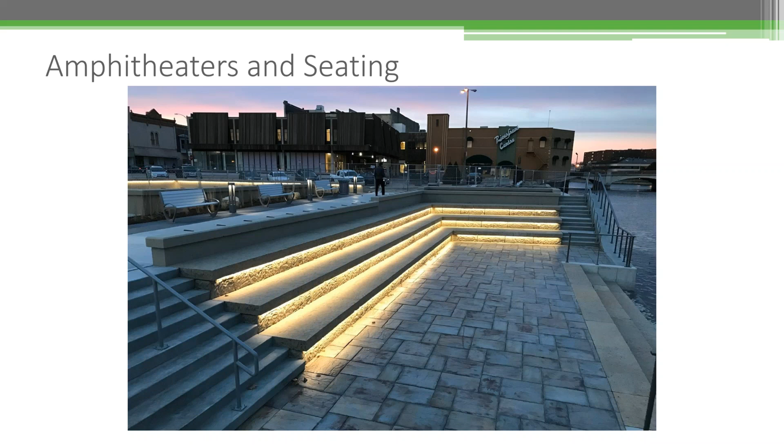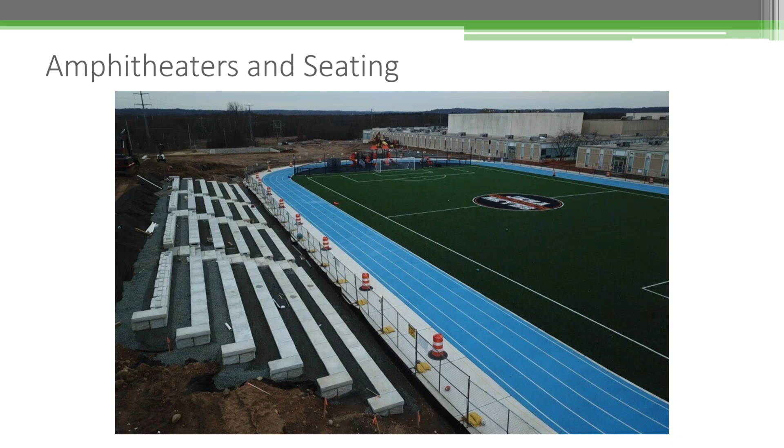We are seeing more and more stadium seating projects. This is a current project right now in New Jersey at a high school. So instead of bleachers, they wanted a nice durable cast in place, or precast concrete steps, seating systems. They've got some custom columns, some freestanding blocks, and custom lighting in our blocks as well. I think once this project is finished, it's going to be fantastic.

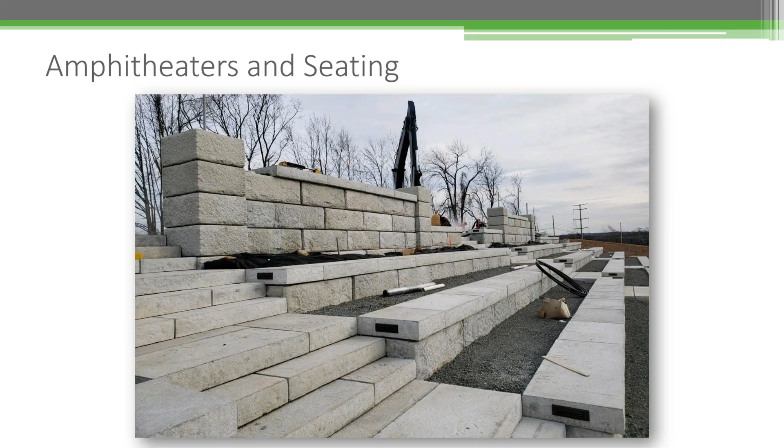So support tools from ReCon. We do have a design and construction manual. It goes step by step through the installation process. There's a lot of design information on there. We've got a nice block catalog in there. We do have a lot of standard details and CAD templates on our website if you are an engineer or an architect looking for information on that.

We do have an on-staff engineer who can assist with retaining wall related questions. And we also have a lot of really competent RCP staff members who can help you with bidding and installation, and just general information on our product.

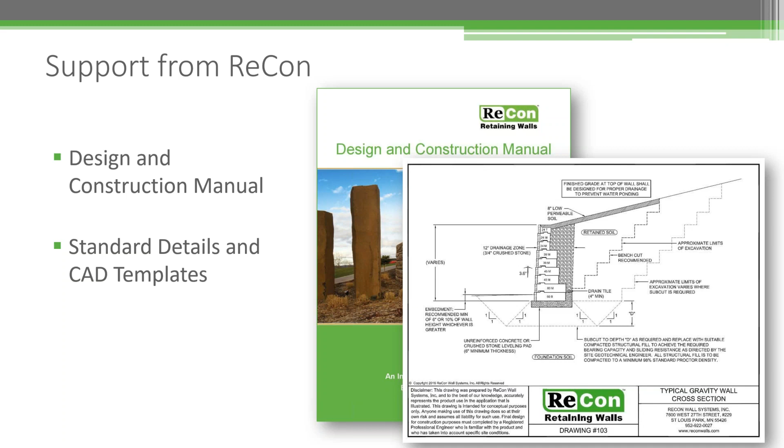We do have a free analysis software with which, as you input your wall geometry, your heights, your site geometries, your back slopes, your toe slopes, your surcharges, the presence of water, you can change your soil parameters, and it'll kick out either a gravity or a reinforced cross section for you. We do have testing with GeoGrids in Synteen, Strata, and Mirafi, as well as GeoStar.

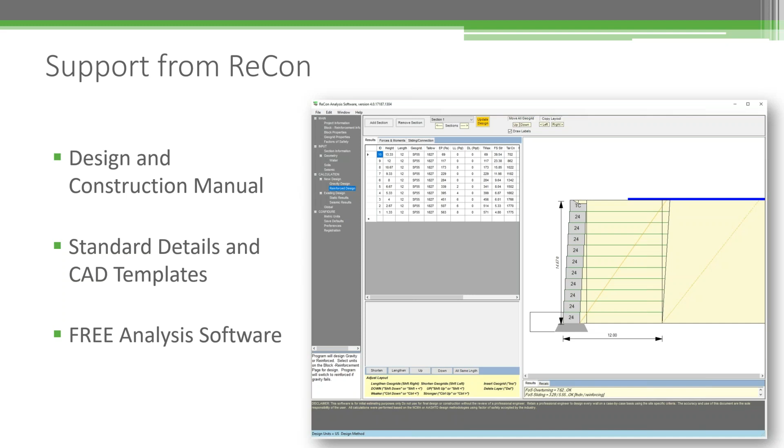Here's a reinforced cross section again, using our 24-inch deep units, and whatever grid was chosen was SF55. This analysis software also can do global stability analysis on both gravity and reinforced wall systems.

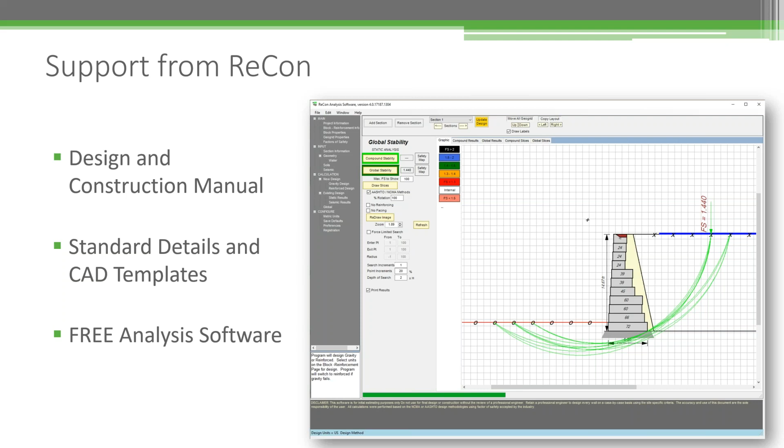And from an installation standpoint, we've got a ton of PowerPoints, a ton of resources for installers who are looking to install ReCon for the first time.

Versus a small block system, obviously ReCon is much larger, which means we're much more expensive - a more expensive product per square foot, or more to get to the job site in terms of freight. However, the value that we can add to your customer in terms of space out in front of their wall, really tucking that wall up against the property line - you can definitely, as an installer, install this product with a lot less crew. You can install it a lot faster than traditional small block methods. We do have a lot of contractor-friendly block shapes that will help you speed up your install. I think having the ability to stain our walls in whatever color that your customer would like is a huge benefit to us.